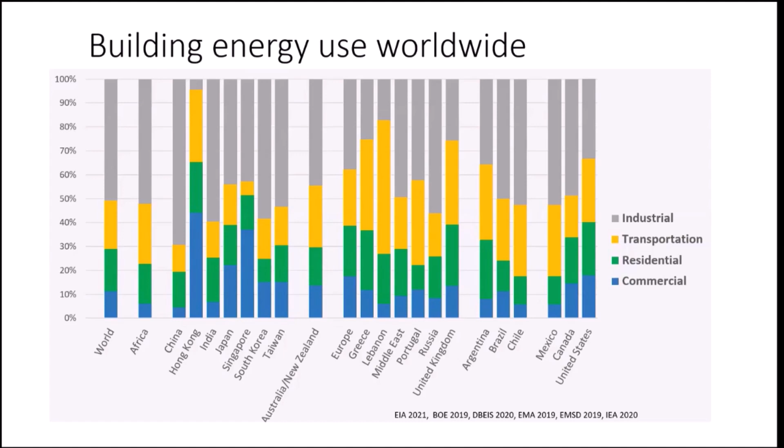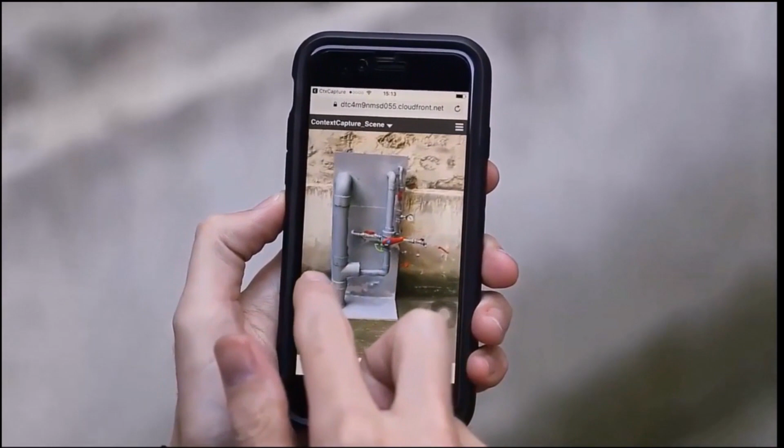Here's an example. One of my colleagues in Canada is taking multiple pictures of an object that's just a mock-up of piping to get some feel for it. They're sent to the server, it comes back, and then you have a mesh model with photos applied to look at it. It's detailed enough that you could probably measure it, or read information off any words that may be on the printed part.

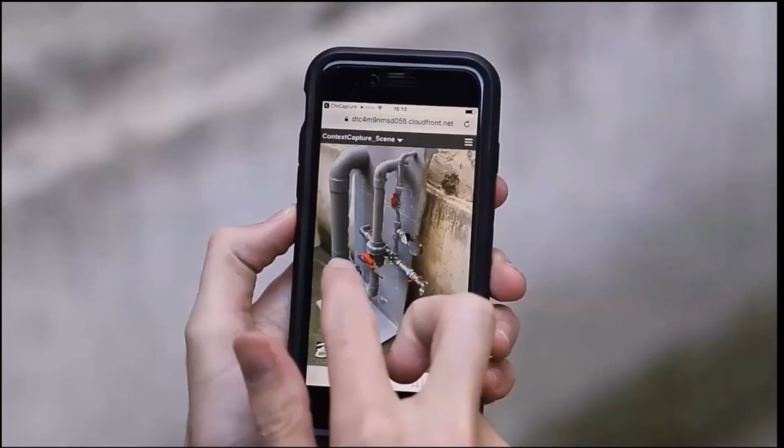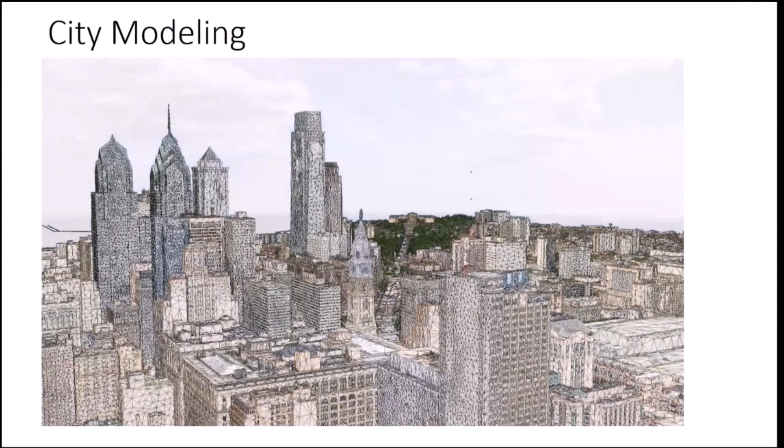One of the early attempts to really look at modeling the city, but also looking at environmental impact, was Philadelphia. That's primarily because my company's headquarters is near Philadelphia, and we've done some work with the city. This was particularly when the Pope went to visit Philadelphia, and they were looking at security and how that could be meshed.

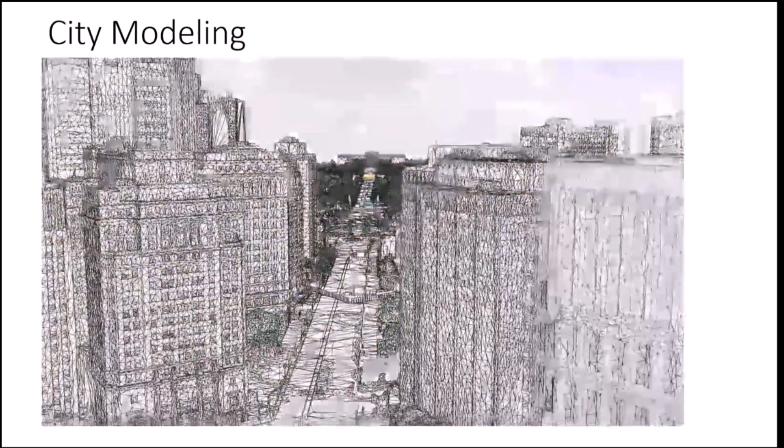They had a model of the city, as you can see here, but within a BIM environment we're able to add the security fencing and other things so they could understand line of sight in other areas. This became a very interesting model for me because we had a 3D model of a city, but we also had data.

In the US, there are about 30 cities now, 30 of the larger cities, that have implemented a program of benchmarking. What this means is they require private companies or private owners of buildings to submit their utility bills every year - electricity, natural gas, and even water - and have that in a public database.

Philadelphia happens to be one of those cities that's been very aggressive about getting that information public. They have an open public database that looks at all sorts of information. I'd say this covers large commercial buildings, anything over about 5,000 square meters. It doesn't capture most small buildings, but they know the building area, what type of business is there, and other related data.

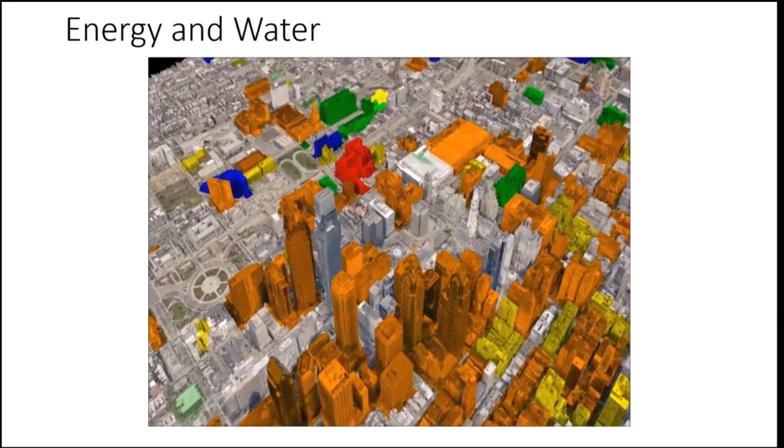With some color coding, blues and greens are lower in intensity and red is higher, so we begin to take a look at that. But it's not just a static model we look at - we can now go within the tools and look at individual buildings to see what's going on for a property. So if I identify a property showing high energy, or red, on here, I can work with that and try to find more information.

There's additional information about energy for that building, and it's all organized within a tool you can use to go in, grab additional information, and start making judgments about individual buildings.

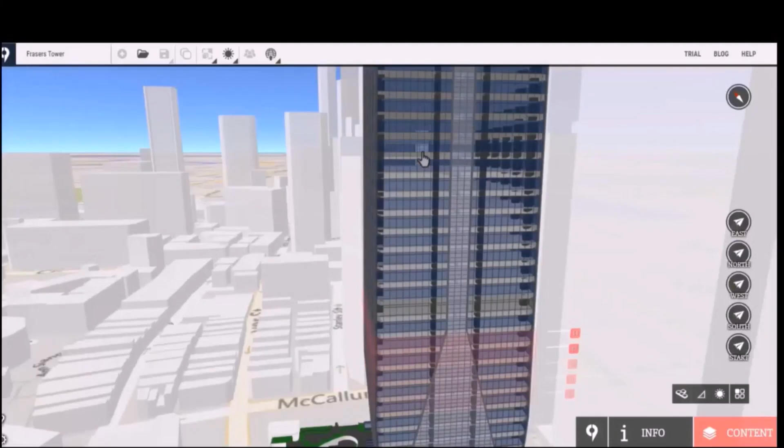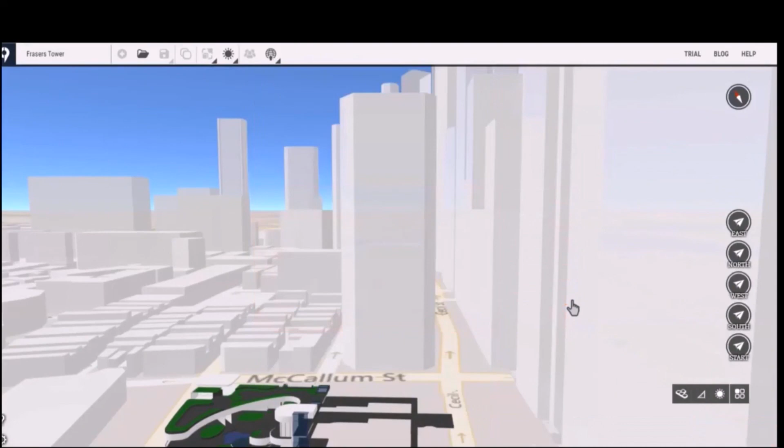The idea of a digital twin has been around for a while, but as a concept it's been catching on more lately, and we'll talk more about that. This is Microsoft's new South Pacific headquarters, in Singapore, where they occupy the 9th through 14th floors of this particular building.

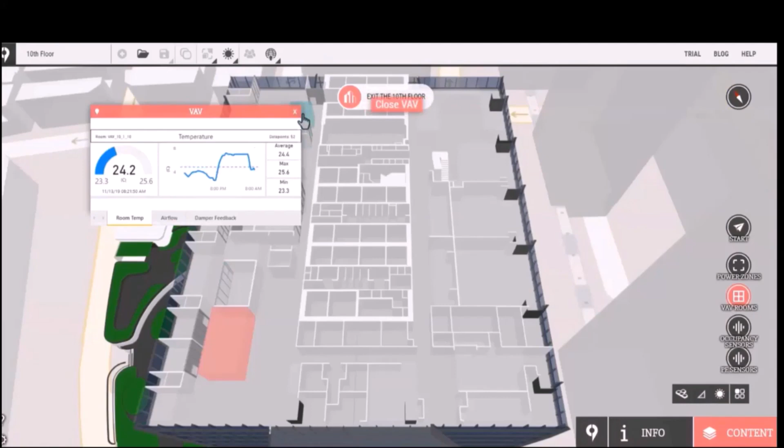Now this is a different sort of model. This is where the digital twin, or the 3D model of that particular building, has been brought in from BIM drawings. That's one of the nice things about the digital twin - you can look at it not just as a mesh model, but bring this in as well. What they're showing as they go through here are different sensors linked to the model to show what's going on - for example, occupancy sensors.

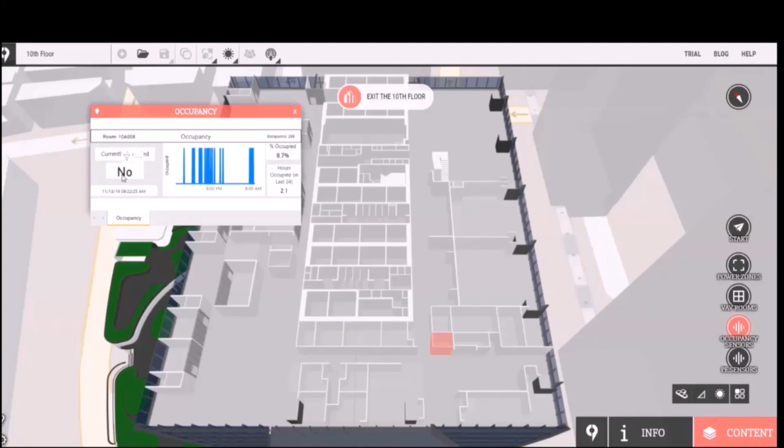If we look at transportation, a key area for many locations, more transportation infrastructure is needed, and that makes a digital twin a very handy tool for being able to look at that. Here's an example of a roadway going through a city, where they're looking to add a new ramp. The nice thing about a digital twin is you can look at it in 3D, but you can also animate it to show how that new infrastructure might look in operation.

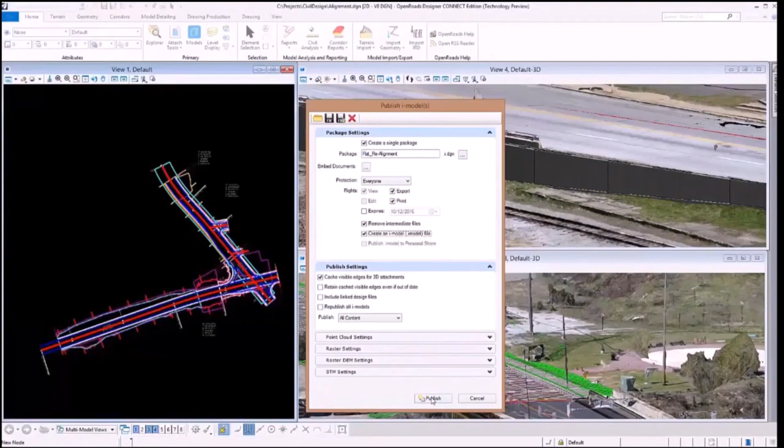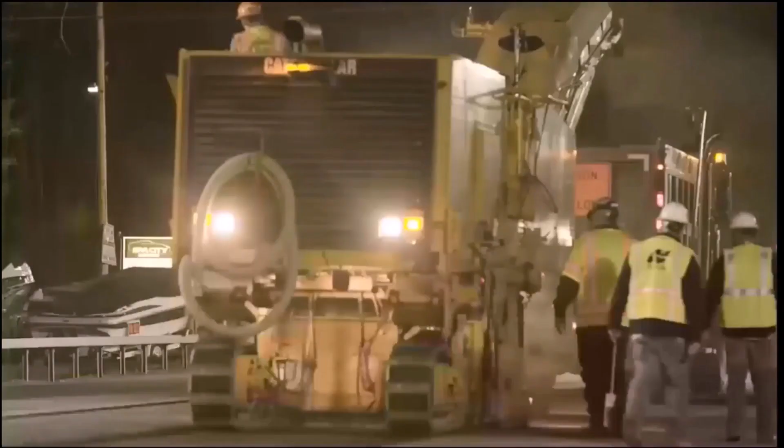Another example uses modeling of an existing roadway to look at how it can be managed, particularly to make the road smoother and take out bumps. The user goes in and looks at the data, done with a point cloud in this case, and the roadway information is then fed to the machines, which can directly use that information.

As far as water and stormwater, this is also very critical, particularly as we've been having increasing climate emergencies and flooding and storms that are beginning to really affect many of our cities globally.

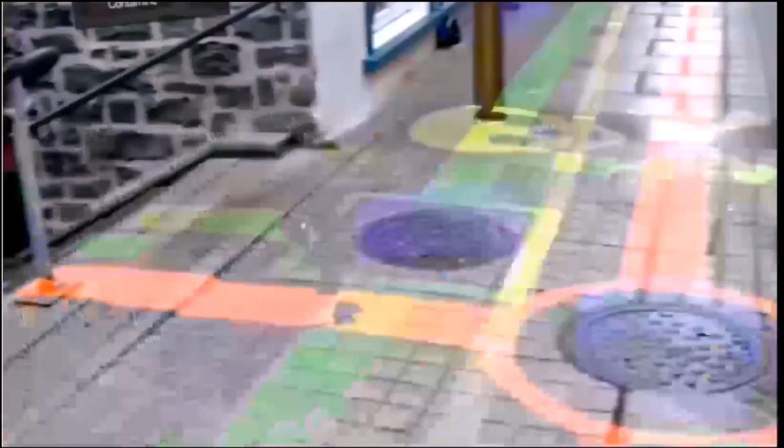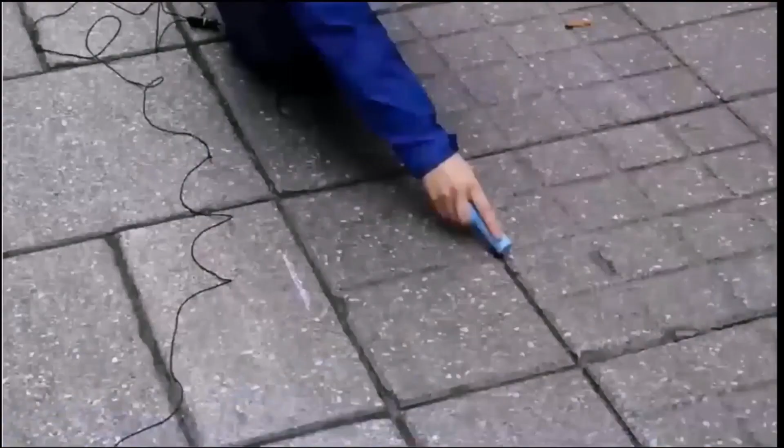This is a colleague of mine in Canada again, and what they've done is add information about utilities on top, viewed through a virtual reality set of goggles, to be able to see where the utilities are underground, modeled entirely. So without having to dig, they know where the water utility is at this point, the water piping going through the city.

That is one of the models that I think we've been seeing a lot more in use for infrastructure planning, particularly flood prevention.

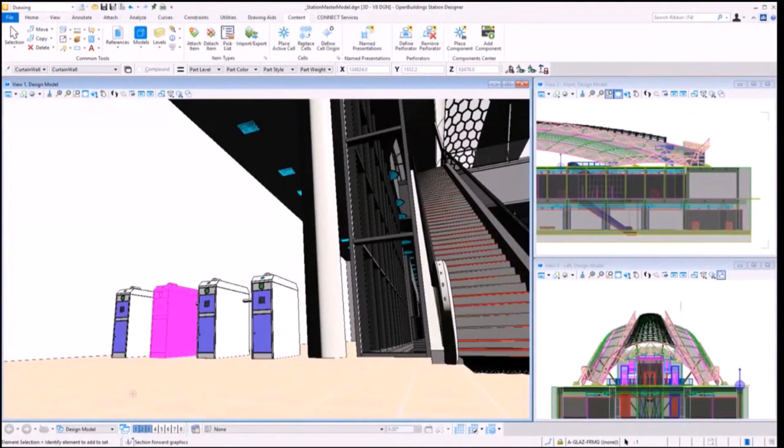There's also another tool which has become very interesting, agent-based simulation, which can be used to model how people move through spaces. In this particular case, this is a new subway station. They did the simulation with the anticipated load, done within the BIM model. So they've gone from 2 to 4 turnstiles to look at the impact, and it reduces the congestion we saw earlier. That's another powerful tool within the digital twin realm.

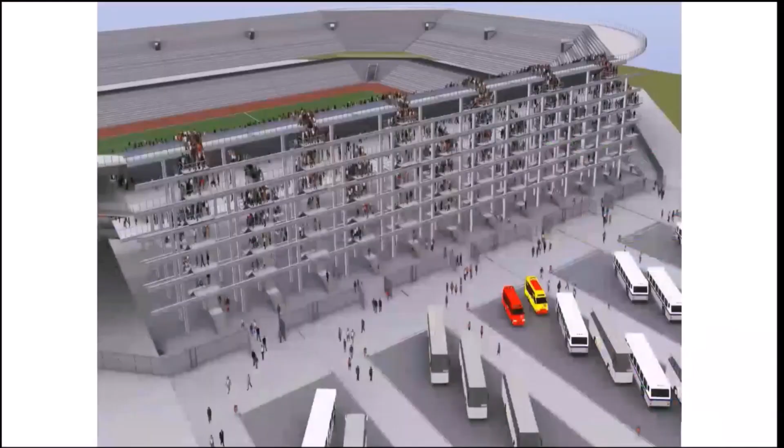It's also used for looking at egress. This is at a football stadium, looking at, for safety purposes, how people are able to get out of the building quickly.

Also using 4D GIS data, they're able to look at and simulate what new developments in an area Singapore was going to do to traffic, how that was going to affect it, and look at particular elements of that.

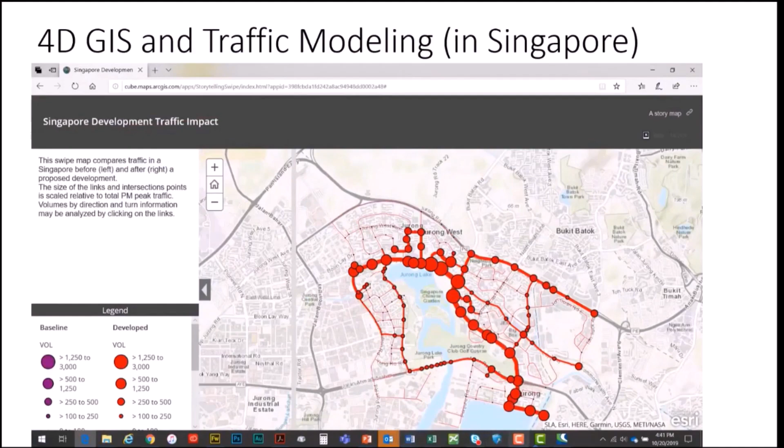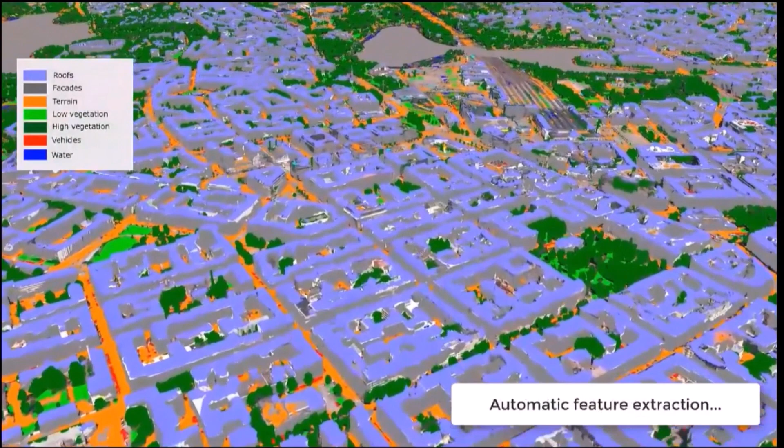This is the 3rd generation model, their new reality mesh. They covered the historic center, about 26 square kilometers. What they're using is some deep learning, machine learning techniques to identify the various elements of that model, so they can determine what's vegetation, roadway, and what are buildings. That's kind of an important piece there.

That city information model, along with the reality mesh we just saw, runs through planning, design, analysis, simulation, virtual and augmented reality, sensor data, big data - lots of different ways of collecting and using data in a single model.

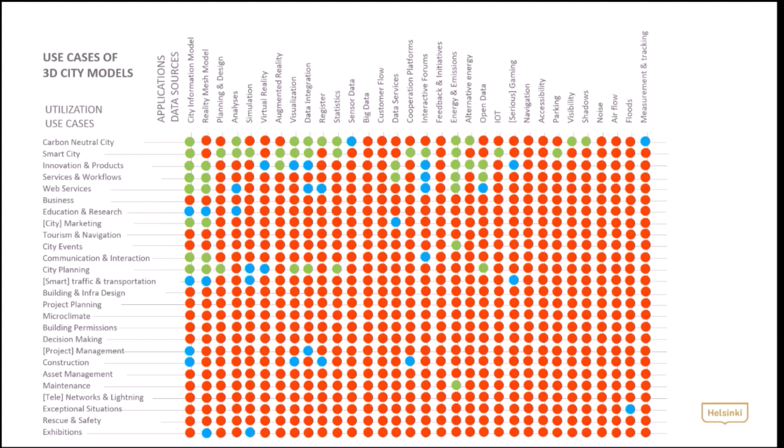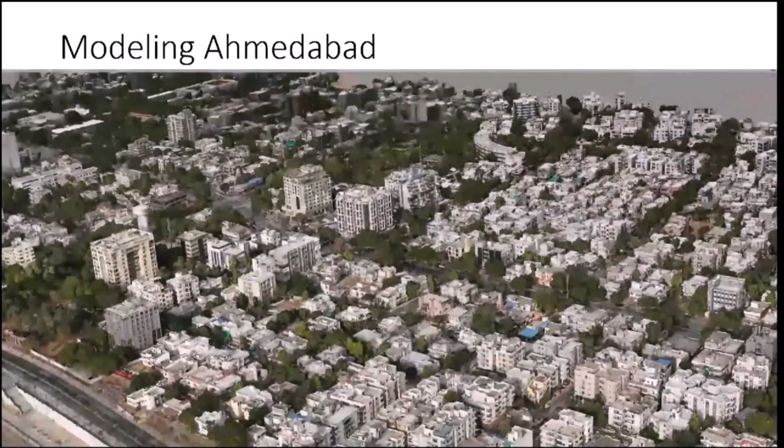One of the interesting recent projects Bentley has worked with is between CEPT University in Ahmedabad and University College London. The idea was to create a model of Ahmedabad - not just a mesh model, which is what you see, an early mesh model here - but to dig into it with more data.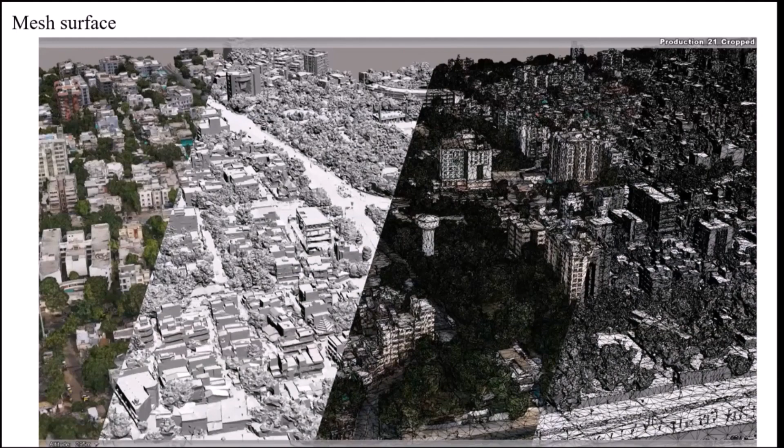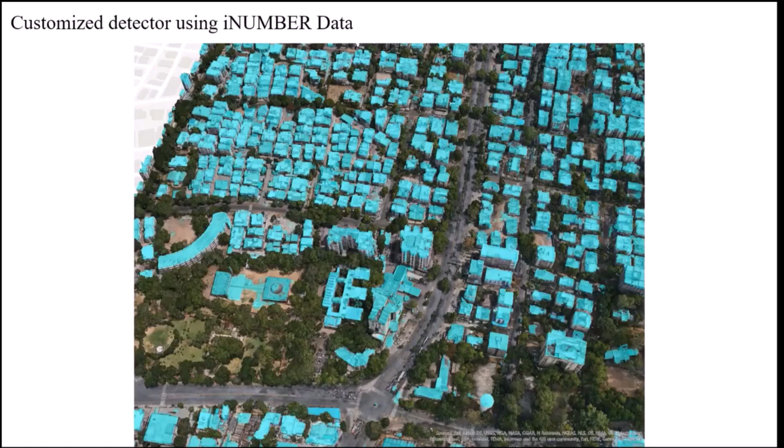We do have a mesh model based on flying the city, trying to capture 250 square kilometers of the city. It's a very ambitious project - I haven't seen one quite that ambitious. Being able to look at the data and collect not only from the 3D drone-flown model, but also other data. Here's the point cloud output, just beginning to look at that.

Then looking at using some machine learning, deep learning techniques to be able to specifically identify what the footprint is, what are trees, and then you can get the actual building footprint from that.

Very powerful tool. From this they were able to create energy models of each building. They had information about size, etc., and since the model is 3D, they could also identify windows, doors, and other openings to calibrate that model more closely to the available utility bills.

The other interesting use of that is to look at some of the buildings, again like we did in Philadelphia, for energy use intensity, and see where the opportunities are for retrofitting buildings or attacking the energy problem, understanding them better to see what the various types were.

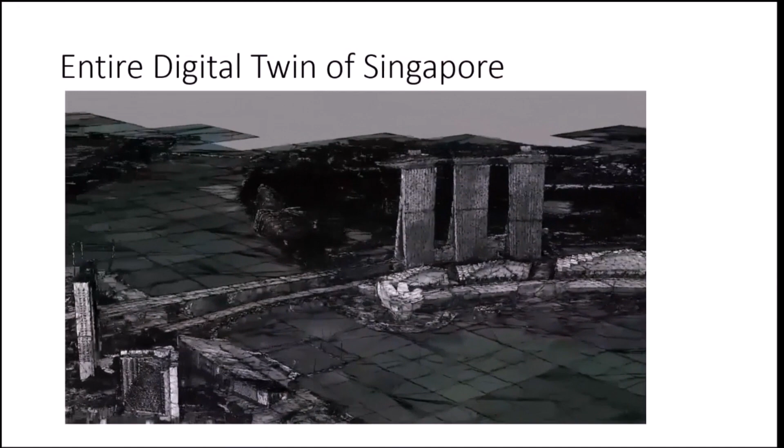The last twin I'm going to show - Singapore, as a city-state, has created a digital twin of the entire city, and it is an interactive digital twin. This is just part of the mesh model, just to show you some of the iconic parts of the city.

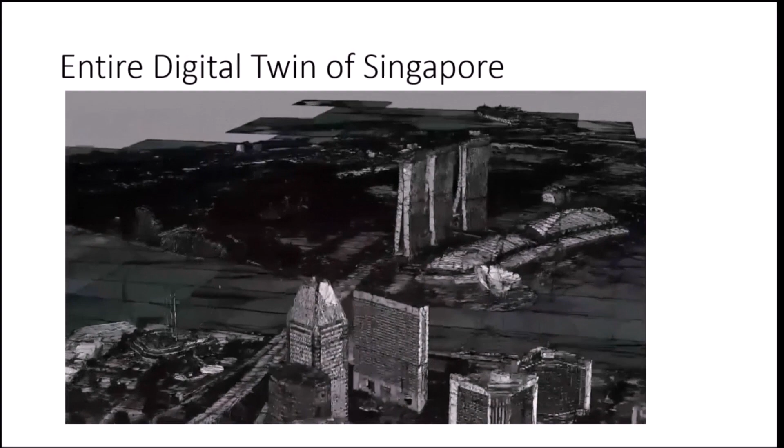Their intent is to keep it growing. As new buildings come in, they get added to the model. So transportation comes into that, energy, water, and other information that they can collect and provide - definitely a planning tool and a tool for moving forward.

So what does that mean for the future? Instead of disconnected information, now we can have information coming together so that individual buildings can talk to the energy system, the renewable system, being able to look at various elements there. The building in its context can know about climate, security, energy use.

The model can be used for planning, also for roadway traffic management, parking, safety, and autonomous vehicles, which are making their way slowly toward us. That ties in, of course, with the water system, the stormwater, and even other systems like rail.

So the idea is taking it to a connected infrastructure digital twin and really being able to move that in a positive way, so no longer will buildings be isolated. Their information can be shared, but also it can be used to minimize energy use and take advantage of renewables and other possibilities for them.

I think this tool is very powerful for doing that. Let me back up to one of the Omnibot pictures that showed this particularly. Here's one of the buildings in Omnibot, and now you're able to identify areas and go in and actually measure where BIPV could be added, either on the roof or some of the building facade areas. That's one of the powerful tools. We may have drawings from many years ago, or maybe not, they could be lost, but being able to pull that information and measure a particular building is very powerful.

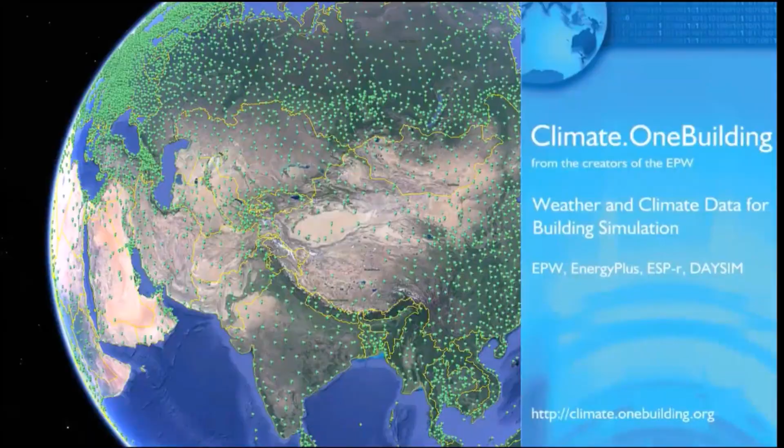Dru, Jyotirmaya here. Good evening. So in building level simulation, the way we have calibrated simulation, we have opportunities to tweak and refine our model. Is there something similar when we are operating at the city level simulation?

Not at an integrated look. We're still looking at individual buildings. I know there have been a number of projects, particularly at universities, looking at urban scale modeling, where you're modeling not only individual buildings but the areas around them to look at temperatures and vegetation coverage, etc., but not truly an integrated whole city level. What you're seeing are mostly still models of individual buildings placed within the digital twin.

So the reason I was asking is if we want to model urban heat island effect or any other effect, for example flicker or glare by photovoltaics from one building onto another building.